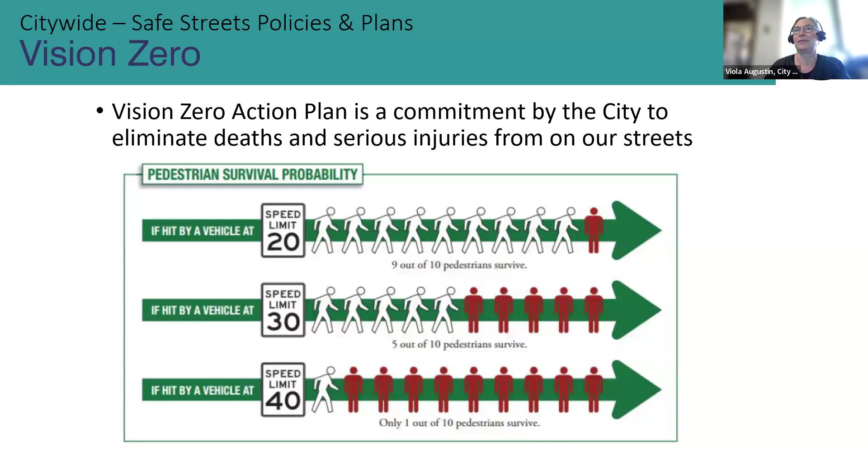Thanks, Viola. So I'm going to walk us through an overview of the project. We'll start with the limit of work. We plan to reconstruct sidewalks and repave Tufts Street as part of the city's pavement and sidewalk management program. With this opportunity, we also aim to redesign the street to make it much safer and more comfortable for all users. This project includes the entirety of Tufts Street, from Cross Street to Washington Street, including improvements on Cross Street where it intersects with Tufts Street.

At this time, it does not include improvements to Washington Street. However, we're excited to share that the MBTA aims to make improvements that include efforts to extend the curb, provide a small segment of protected bicycle lane, and float the bus stop. Floating bus stops provide dedicated waiting and alighting space for bus riders. It also includes moving the crosswalk more west to make it easier to get to the East Somerville Green Line station.

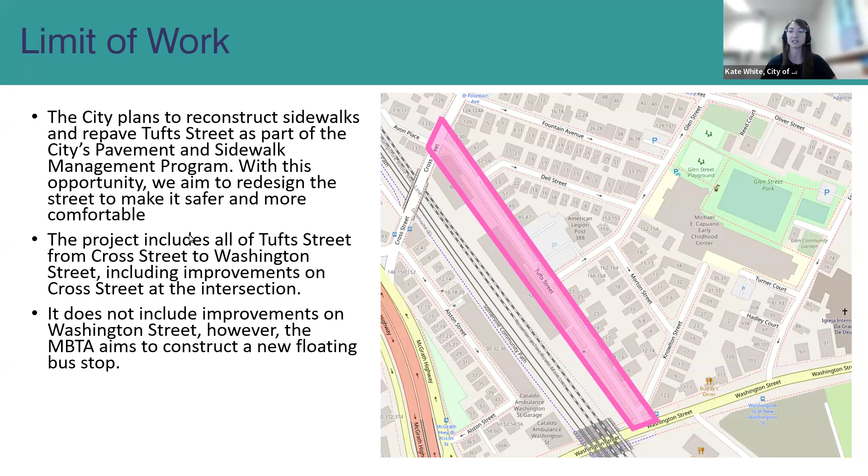The MBTA plans to install a rapid flashing beacon, or what you can see as a flashing crosswalk sign that will be push button activated and blinks yellow. We anticipate this work to take place in 2024.

Just to help put some ideas of what's included in the project and what it's not, we wanted to share what elements are definitely included. As we described, we aim to reconstruct all of the sidewalks and curb ramps, repave the entire street, plant new trees, install new and improved crosswalks, make minor parking regulation changes, construct new landscaped areas, install traffic calming, and change the width of the sidewalk.

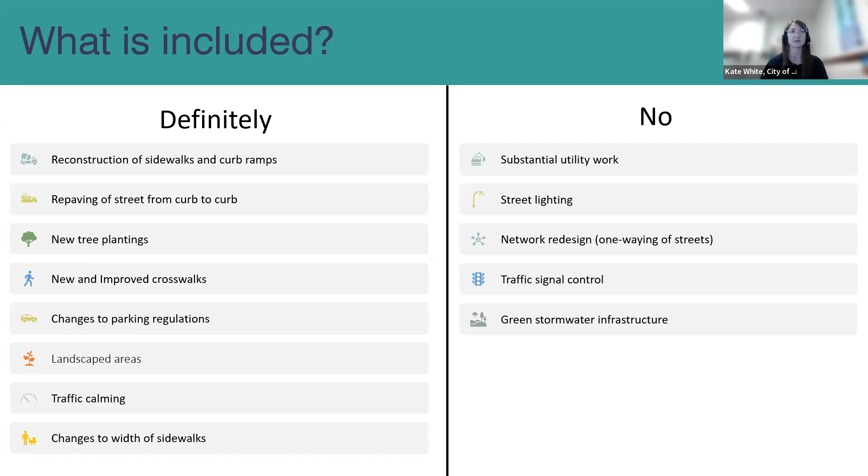In this project, we do not aim to include substantial utility work, make changes to street lighting, one-way the street or change any of the network design, and install traffic signals or construct green stormwater infrastructure.

To reconstruct a street, we first wanted to provide a bit of a timeline of this entire project, and you can check on our website to see the work from the beginning of this project to now. But we just want to provide an overview of the timeline. To reconstruct a street, we first work on developing a concept.

The conceptual design development phase started last summer, where we gathered feedback from community members about their transportation safety concerns and their priorities for the street. We also shared out potential concept ideas to see initial community reactions. Taking all of that feedback and really aligning our development with our guiding plans, we developed a concept idea which we shared in October 2023. And here we looked to gather community feedback, field questions, and clarify the directions of the project.

From October to November, we collected this feedback, and we also worked with our engineering consultants, and we collaborated with other departments like fire, the Department of Public Works, parking, public space, and urban forestry to build out a more defined and updated design.

As we work in this stage, the design ideas are turned into technical drawings with all the details necessary to build the street, and we were able to work out some of the constraints. We're now coming back to you with that updated, near-final design to hear your questions and comments.

So we're pulling out that design from July and August right now to move towards finalizing those designs later this fall. Then we work to prepare for construction, meaning the project designs go out to bid and we look for a contractor. After a contractor has been signed, they can mobilize and construction can begin. We anticipate construction to take place between 2025 and 2026.

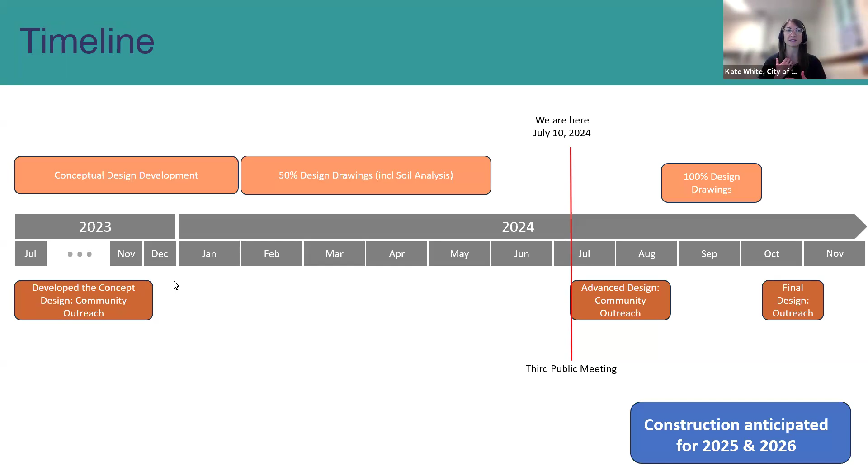I'll now hand it back to Viola to talk about our concept from last fall, summarize that, and go into other considerations for the street.

Last October, as Kate just said, we shared the chosen concept based on feedback from our summer and early fall outreach. In the next few slides, I will recap what we proposed for the Tufts Street redesign, which we call meandering opportunities.

Before going into the design itself, I want to reiterate the design considerations for Tufts Street. One is that the street is designated as a neighborway in the Somerville Bicycle Network Plan. Neighborways are walk- and bike-friendly streets that create low-stress bicycle experiences on residential streets. They're designed to have fewer and slower cars, to feel comfortable for people of all ages and abilities to ride a bike, and they provide a residential street alternative for people riding bicycles without adding full bicycle lanes or making major parking regulation changes.

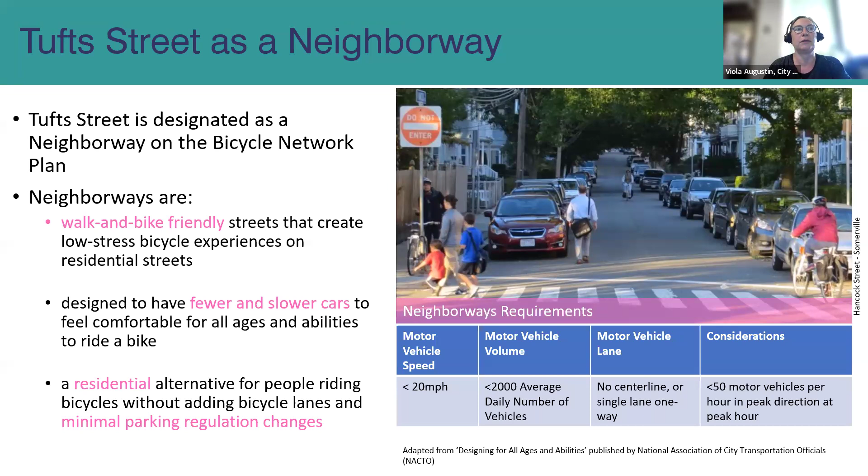Adapted from Designing for All Ages and Abilities, published by the National Association of City Transportation Officials, also called NACTO, neighborway requirements include an average motor vehicle speed of less than 20 miles per hour, less than 2,000 daily average vehicle volumes, and less than 50 motor vehicles per peak hour in the peak direction. That is what we're aiming to achieve with any new design on Tufts.

Tufts Street also connects to other bicycle facilities. Besides intersecting with the existing bicycle lanes on Washington Street, Tufts Street also connects to a new quick-built neighborway on Glen Street. We'll have a slide on neighborway treatments later in this presentation, but you'll also see quick-built neighborway treatments this summer when we install them, as shown on the plan, on Glen Street, on Ellsworth Street, part of Rush Street, and at the East Somerville Community School, onto Otis Street.

These connections include the Capuano Early Childhood Center, the East Somerville Community School, Winter Hill at Edgerly School, and the commercial corridor on East Broadway.

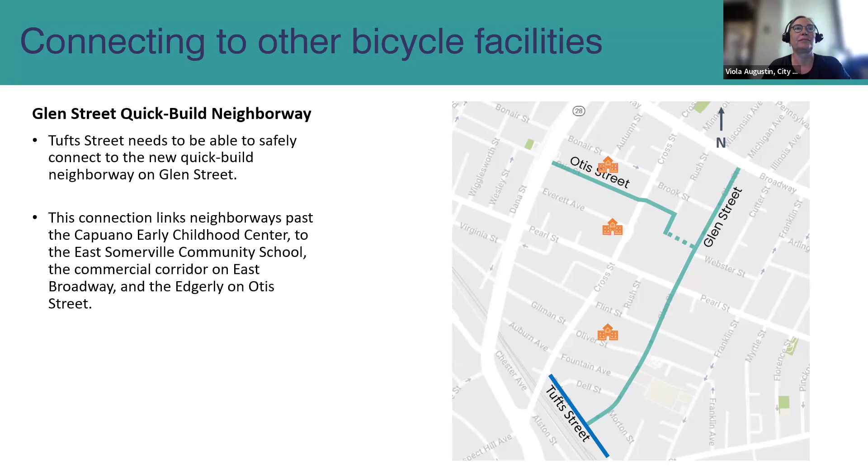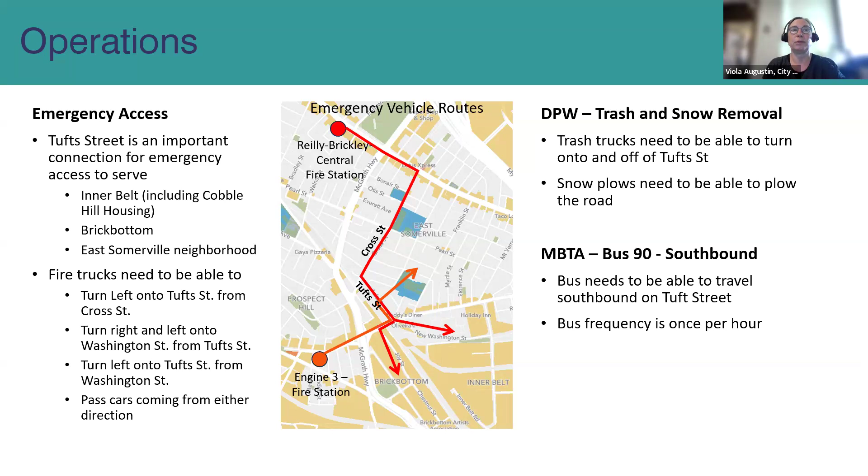For DPW snow and trash removal, trash trucks need to be able to turn onto and off of Tufts Street to service the area. Plows need to be able to clear the street of snow, and currently the MBTA Route 90 bus route includes a southbound connection on Tufts Street. Therefore, buses need to be able to travel approximately once per hour on the street.

With all of that in mind, we shared a concept in October 2023 that includes transforming Tufts Street into a meandering 12 feet wide yield condition street. Yield streets are not uncommon in Somerville, but often look like narrower two-way streets with parking on both sides. Examples include Lake Street, Perry Street, and Nashua Street.

The concept used wider sidewalks and new landscape areas to provide more space for people walking and wheeling, and new greenery and trees. We included dedicated pullover spaces to allow vehicles and bicycles a space to move out of the side and allow oncoming traffic to travel past them, because of the yield street condition.

The meandering nature encourages people driving to slow down and makes it safer for people biking to travel along the street. We also proposed new crossings with raised intersections at Dell and Glen Street, along with new raised crosswalks across and parallel to Cross Street, Knowlton, and Washington Street.

For more information about this, check out the recording of the second Tufts Street community meeting, or check out our concept design handout, all to be found on our webpage.

We have proposed these ideas to meet the concerns about speeding along Tufts Street, create new crossing connections along the street, and provide more trees and plants to increase shade and make the street more comfortable.

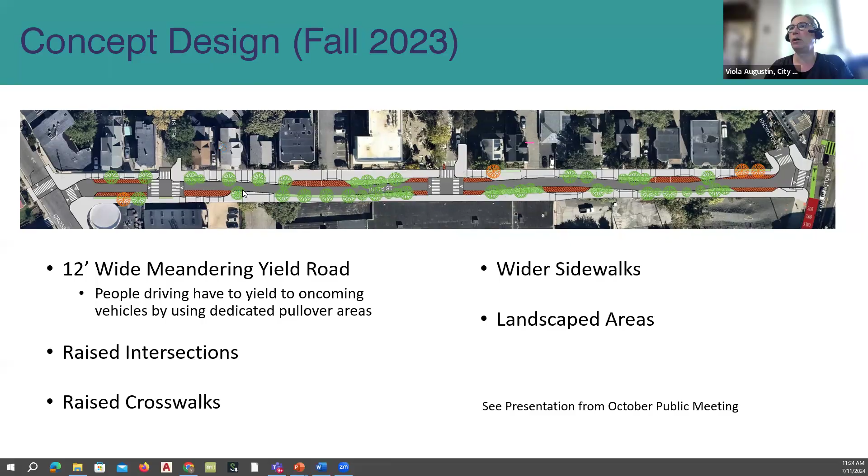Thanks, Viola. So as Viola described, I'm going to share what we've learned both in community engagement as well as some further due diligence our team has been working on.

So from September 2023 through December, we aimed to provide a variety of ways that community members could participate and share their input on the concept design, with a specific focus on reaching those who've been historically underrepresented and underheard through activities like direct street outreach and attending community events in multiple languages.

This graphic shows some of those examples. We began with a virtual community meeting on October 11th after flyering homes on the street in the neighboring area. We then also hosted an online feedback survey for approximately about a month and a half.

We hosted two street outreach pop-ups, one right at the intersection with Knowlton Street and another at the Capuano Early Childhood Center right at school dismissal.

We attended four community events, including examples like Somerville's Monster Mash, along with the Spanish and Portuguese community meetings, and a specific event with the Council on Aging for an Asian Tea Party in December.

We also consulted with our city commissions and committees that advise on a variety of different transportation projects and policies. This includes our Commission for Persons with Disabilities, our Bicycle Advisory Committee, and our Pedestrian Transit Advisory Committee. This totaled overall approximately over 230 people.

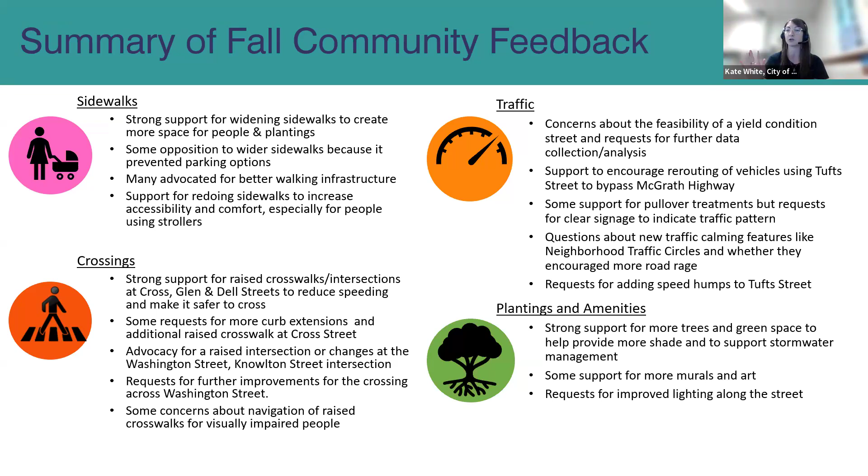Some residents were interested in additions of murals and art. And we heard both in the first round of feedback as well as this, just the desire to make more pretty the large white wall at 50 Tufts Street.

We heard some concerns around existing light on the street and just heard requests for benches and trash cans. Some opposed just additional greenery as they saw it excessive or preferred to have parking options.

Getting into bike facilities, there was some support for new biking conditions in the concept, as well as some concern around the efficacy of the traffic calming to make it a neighborway condition safe for biking in the travel lane. Some suggested making the pullover segments more separated bike infrastructure. And some asked for waiting areas to make turns easier while biking.

Some opposed the designs that require people biking to dismount at intersections or pull over to allow oncoming traffic. And some advocated for painting the crosswalk across Washington Street with green markings to indicate that it could be shared use with folks both walking, wheeling, and biking.

We heard a lot around turns onto Tufts Street, especially around Washington Street. And some residents, getting into some of the parking concerns, who live nearby shared their concern and stress about the lack of parking in the concept.

They described that it's currently difficult to find parking, and they were concerned that the demand could increase with the opening of 31 Tufts Street.

Some felt that installing more trees did not preclude parking, and some shared their concern about people illegally parking in the pullover areas, causing traffic jams.

We want to round out our feedback summary with an overall question we asked in the survey, so we just asked folks about their general feedback on the concept. We had 63 people contribute to our survey.

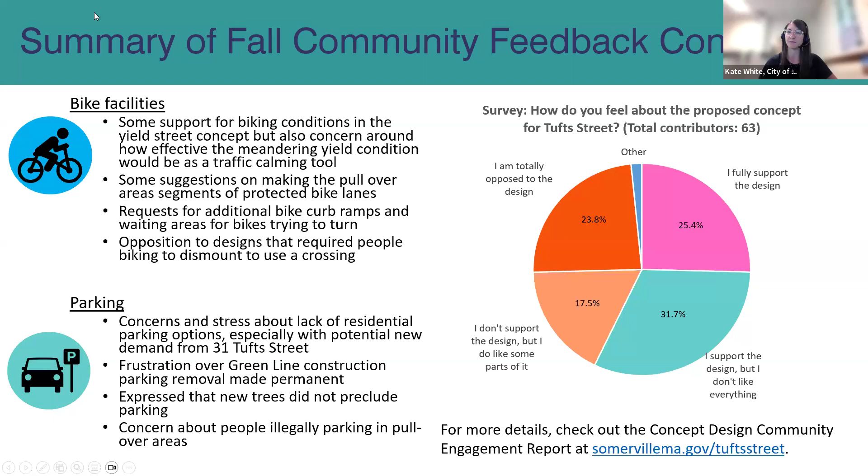To share a little bit of what else we learned, we conducted a Yield Street demonstration with the fire department last November to test some of the ideas. We simulated this with traffic cones and indicated the traffic pattern change with variable message boards.

Once we removed the cones, we actually saw speeds increase to 20 miles per hour or faster. We saw more vehicles travel northbound than southbound along Tufts Street, and saw vehicles traveling southbound yield to oncoming traffic before entering the demonstration. The fire trucks drove without problem in both directions, but some of the people driving used the pullover space.

During the demonstration, some people used the pullover spaces while some didn't and caused gridlock. One vehicle illegally parked, seemingly to drop off food, and this prevented a pullover opportunity and caused traffic. So some of the lessons we learned were that pullover areas need to be long enough to account for people illegally parking and need to be clearly identified and designed for easy access.

In particular, the entrance to Tufts Street from Washington Street needs to be wider to accommodate more traffic at peak times. And the design needs to consider aggressive and confused driving behavior.

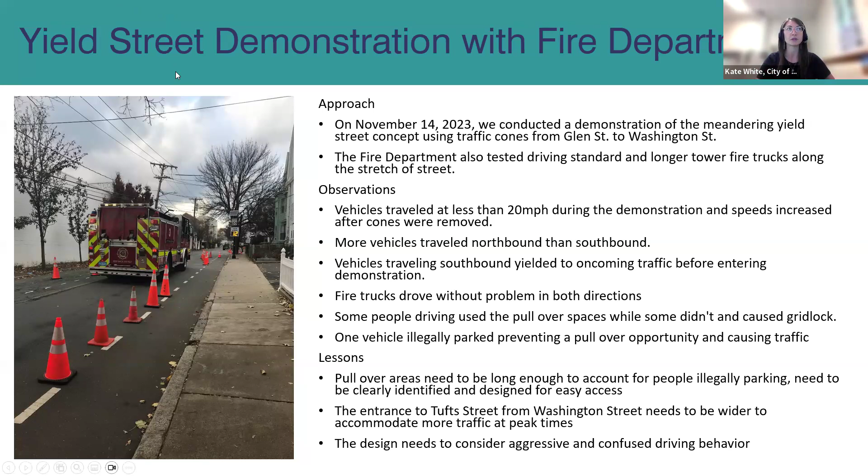We also collected some parking utilization data just to help us better understand the demand in the immediate area. We did this for 2 days in October at two different times, one at midday and one at night. Night tends to see the highest demand in our city, but we also wanted to see what the daytime activity was like, especially as there is a school nearby.

At night, approximately 21%, 57 residential parking spaces out of 267 were available for parking, and there were 44 school drop-off and school parking lot spaces out of 53 available. So it's about 21% for residential spaces. In comparison, before parking was removed on Tufts Street for the Green Line extension construction, there were 25 on-street spaces available. If you're interested in learning more, check out our report at our project website.

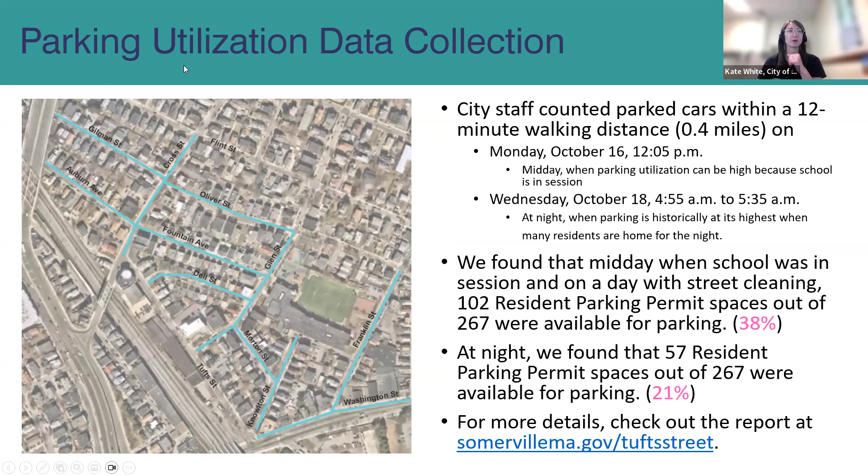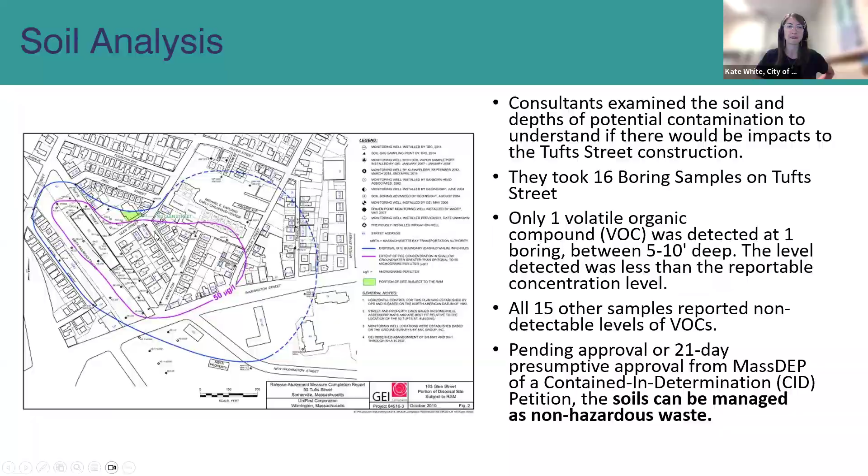So I'm now going to hand it back to Viola to tell us more about the updated design. Thank you, Kate. The final set of slides will now describe in detail the updated design that responds to all the feedback we received.

Before going into the details, I want to reiterate our overall design goals derived from feedback and operational requirements. The reconstruction of Tufts Street should make the street safer, accessible, and more comfortable. Safety is important for people walking, riding, driving, and for emergency access. We aim to achieve this by designing for lower speeds, fewer cars using Tufts Street, providing safer crossings, and ensuring clear passage for fire trucks. Accessible sidewalks and crossings can be accomplished by widening sidewalks, using smooth pavement, and considering accessibility challenges when designing crosswalks. Comfort and a more pleasant environment are created by adding trees and planted areas, wider sidewalks to allow for benches, and by mitigating the white blank wall along the west side of Tufts Street.

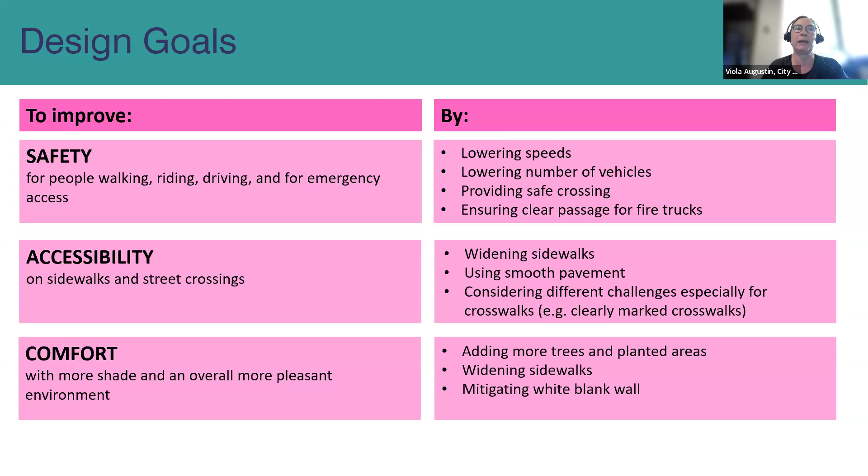Here we see the updated Tufts Street plan all the way from Cross Street to Washington Street. We responded to concerns about the yield street, both from the public and the fire department, and changed the design to maintain the two-way 20-foot wide road. But we added a few 12-foot wide pinch points for slowing traffic and making it less desirable to use the street to just pass through. We improved all intersections: Cross Street, Dell Street, Glen Street, and Washington Street. We kept the added raised crosswalks at Dell Street and Glen Street, and we widened the sidewalks, added more landscape areas, and reintroduced a few parking spaces in 2 areas along the street.

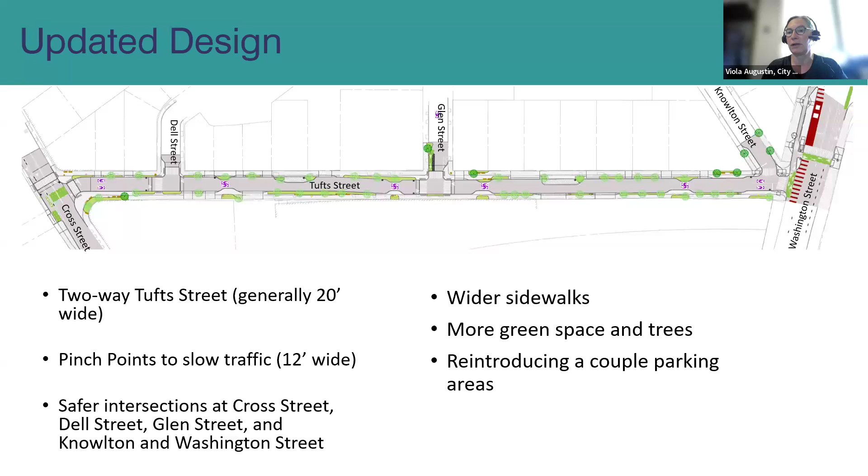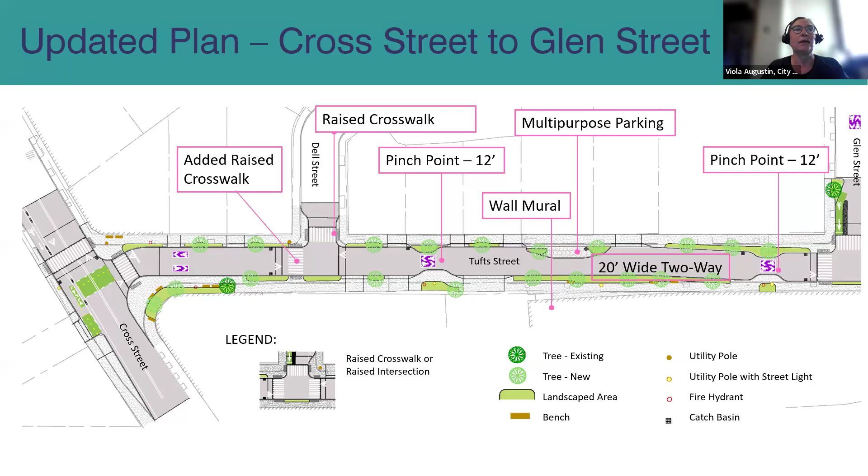Looking closer at the section of Tufts Street between Cross Street and Glen Street, we propose to upgrade the crossing across Dell Street to a raised crossing, add a raised crosswalk across Tufts at the Dell Street intersection, introduce 2 pinch points with a road width of 12 feet and therefore a wider sidewalk there, and create an area for multi-purpose parking. In this section, we will start the wall mural on the white wall to increase comfort and experience. All along this section, as well as the other one, sidewalks will be widened and more planted areas will be introduced.

In the section between Glen Street and Washington Street, very similar, we will have a raised crosswalk and a neighborway gateway treatment at Glen Street, which we'll go into detail on in a later slide. We have 2 pinch points, again at 12 feet width. The wall mural continues, we add another multi-purpose parking area, and again more planting or landscaped areas and trees along the section. Besides the pinch points, we maintain the 20-foot wide roadway for a 2-way street.

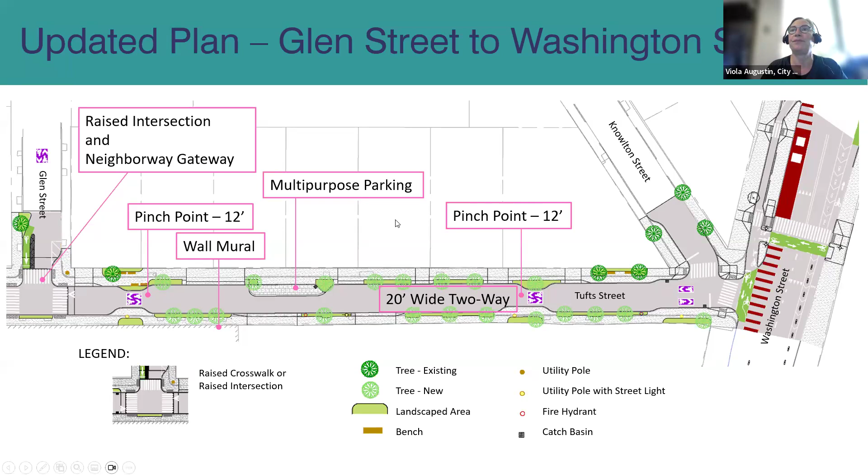Looking at the Cross Street intersection, what we were able to accomplish is a safer crossing across Tufts with a raised crosswalk. We also narrowed the crossing, and as you see, we have a wider sidewalk or curb extension. We added a raised crosswalk across Cross Street. There's a lot of crossing going on here. What we also achieved is a safer connection for bicycles in and out of Tufts Street and all the way to the community path. As Kate mentioned, there was a desire for an additional crosswalk closer to the community path entrance and exits, which would have been at the side of the bridge, the current Cross Street bridge. The sightlines there are so bad that we don't feel it's a safe way to introduce a crossing.

So in the interim, we are widening the sidewalk from Tufts Street to the bridge, and at the bridge it's already wider. Very much like it is at the Washington Street entrance to the community path and station, we'll have a shared sidewalk where bicycles and pedestrians can access the community path. On the plan, the green areas are where bicycles can go in and out of Tufts Street, both coming from the north of Cross Street and from the south on that widened sidewalk.

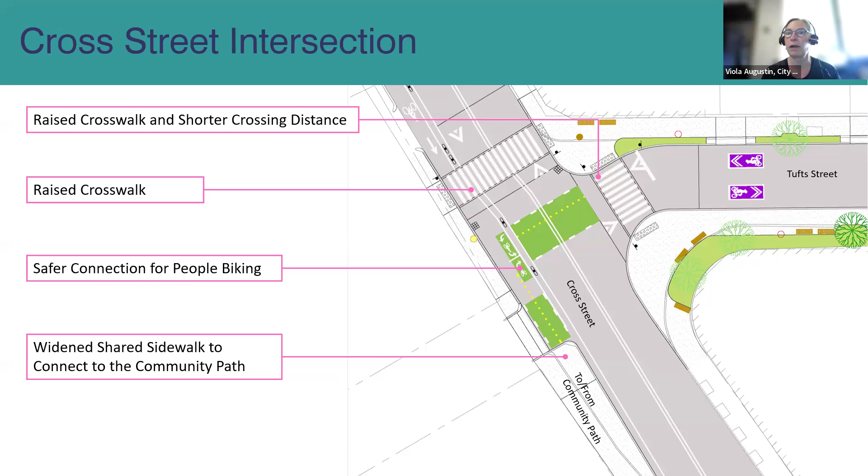The intersection at Washington Street will also see huge improvements. The first ones I want to mention are the bus stop island, or floating bus stop, that Kate mentioned earlier, and a new crosswalk with push buttons for activation of the blinking yellow light for pedestrians and people on bikes. As Kate mentioned, these improvements will be constructed by the MBTA. We've worked closely with them and were able to integrate their design with a bicycle connection and an improved intersection at Tufts and Washington.

Again, the green areas are the bicycle movements from Washington Street to Tufts, and the movement will go onto the sidewalk on the east side of Washington Street. That shared sidewalk is the connection to the East Somerville Green Line station and also to the community path.

For the intersection at Knowlton and crossing Tufts Street, there were some technical challenges to making them raised. What we were able to accomplish is to shorten the distance, especially across Tufts Street, which should make it safer for pedestrians and also slow down vehicles.

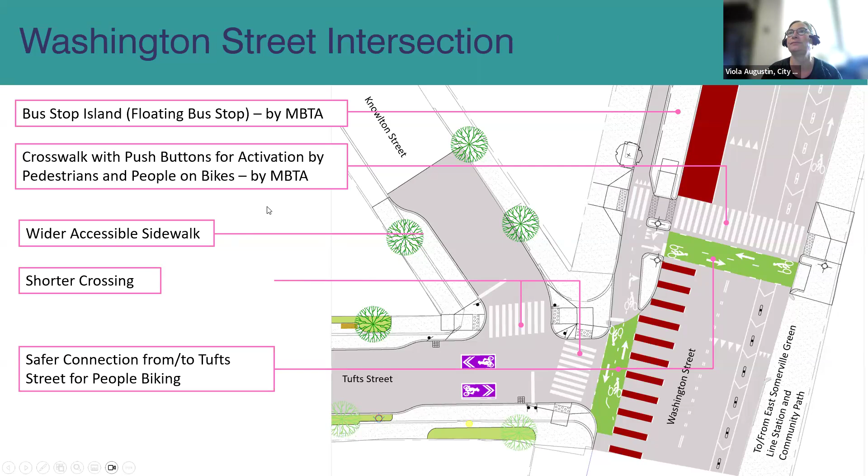To go into more detail on the interventions along Tufts Street, we've mentioned the raised intersections and crosswalks. These are commonly seen throughout Somerville — crosswalks that are raised to let pedestrians continue at sidewalk level, enabling people using wheelchairs, other mobility devices, and strollers to cross more easily, and making drivers slow down and increase visibility when people are crossing.

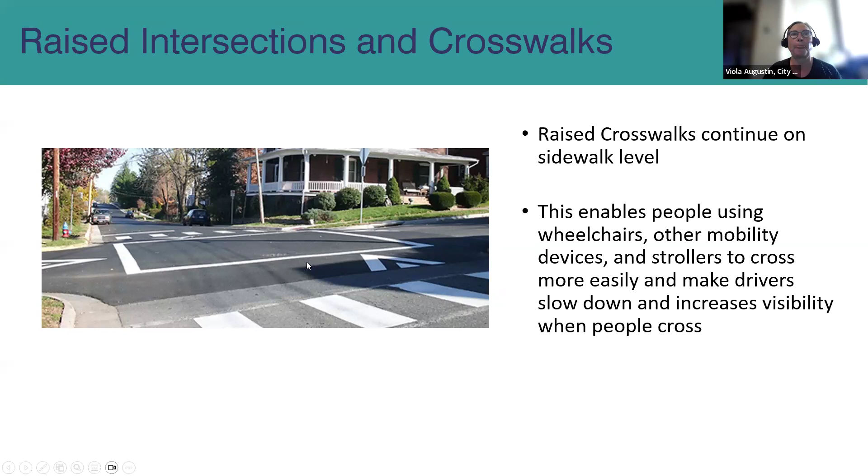The pinch points are a newer thing in Somerville. As explained before, they narrow the road, so cars have to wait, slow down, and let other cars through. The pinch points on Tufts Street are about 12 feet wide.

What this allows is wider sidewalks, and these sidewalks then create opportunity for planted areas or benches, or to make sure access is provided around existing utility poles.

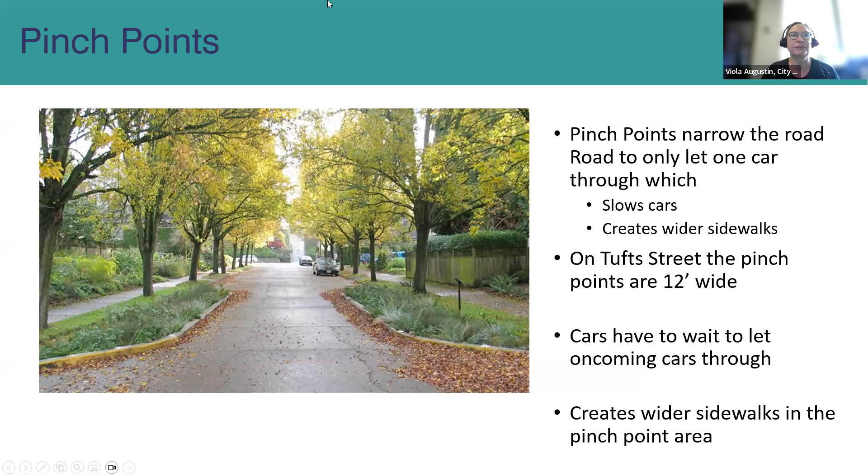We talked a lot about neighborway treatments in previous slides. This is a mock-up of a quick-built neighborway gateway that will be installed on Glen Street, connecting all the way through Otis Street. The gateway provides a safer intersection for people walking, driving, and biking, and creates a short contraflow bicycle lane, because neighborways allow bicycles to go in both directions even though it's a one-way street otherwise.

At the intersection of Glen and Tufts Street, the Glen and Otis project will add a quick-build version of this gateway treatment, and the Tufts Reconstruction project will turn it into a permanent treatment. Along Tufts Street, and also Glen and Otis and at the intersections, you'll see these purple branding signs.

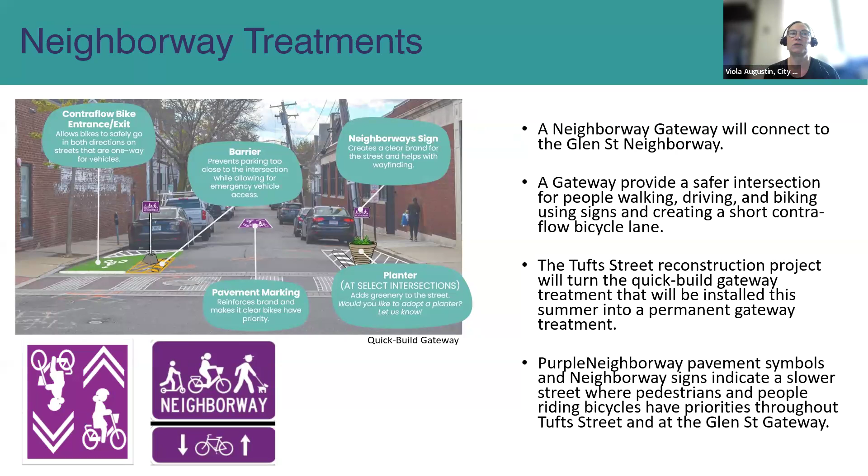These are signs indicating that you're entering a neighborway, and you'll also see neighborway pavement symbols along the street to reiterate to people using the street that, in a neighborway, you should give pedestrians and bicyclists priority.

We mentioned the additional landscape areas and wider sidewalks. This is a typical section right next to Glen Street. The plan shows that the pinch point allowed us to widen the sidewalk, and the green areas are all landscaped areas where we aim to use native plants, and we can add trees in a much healthier environment. We can also accommodate benches in these areas.

At the lower part, the round circle is a utility pole, and we were able to use a planted area so that the utility pole is more at the edge of the sidewalk and not right in the middle of it.

And it also allowed us to create a 4-foot minimum accessible sidewalk path around the utility poles, which in a lot of cases, especially on the west side of Tufts Street, is not the case currently. The sidewalks there are too narrow to be accessible.

I want to briefly mention trees. We will add a lot of trees, but the current trees are not in good shape, so most of them we're planning to remove. But 4 of the ones that our urban forestry division told us are healthy enough, we are maintaining. You see one of them at the top of this drawing, and again you see how we incorporated a planted area around this tree that is currently situated with a sidewalk. It's not an accessible sidewalk.

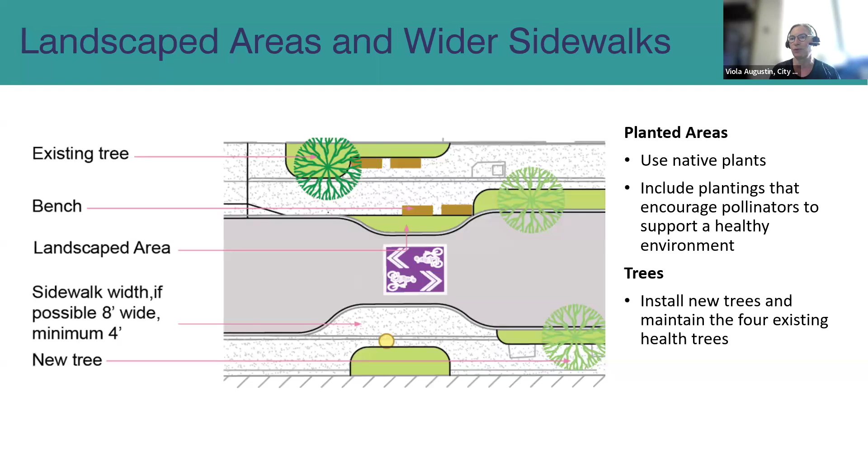And then the multi-purpose parking options, the 2 areas that we're introducing, one between Cross Street and Glen Street and the other between Glen and Washington Street. In those, we want to provide different types of parking throughout the day to accommodate different needs. What we've seen and heard is that permanent resident parking is wanted, but also the need for quick delivery. Kate mentioned the gridlock created by one of the food deliveries at the demonstration project.

So we acknowledged the need for that and created these areas. What we're proposing is a loading zone in the daytime and longer term resident parking overnight. And in Somerville, these loading zones can be used for 20-minute loading, unloading for commercial vehicles, and 5 minutes parking for passenger vehicles to pick up and drop off things.